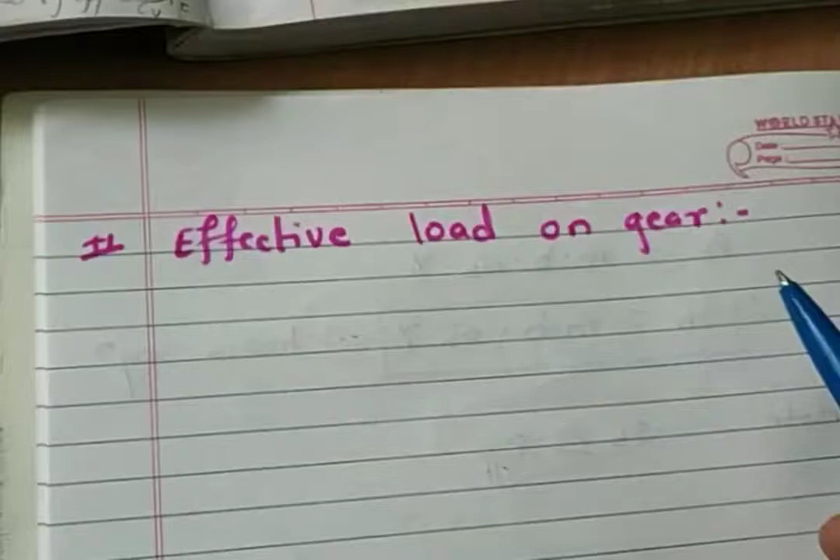Hello everyone, let's continue the design of the spur gear. Here today we are going to discuss effective load on gear.

Last time while studying the Lewis equation, we have seen that the beam strength of the gear should be greater than effective load on the gear. So let's discuss what is the effective load.

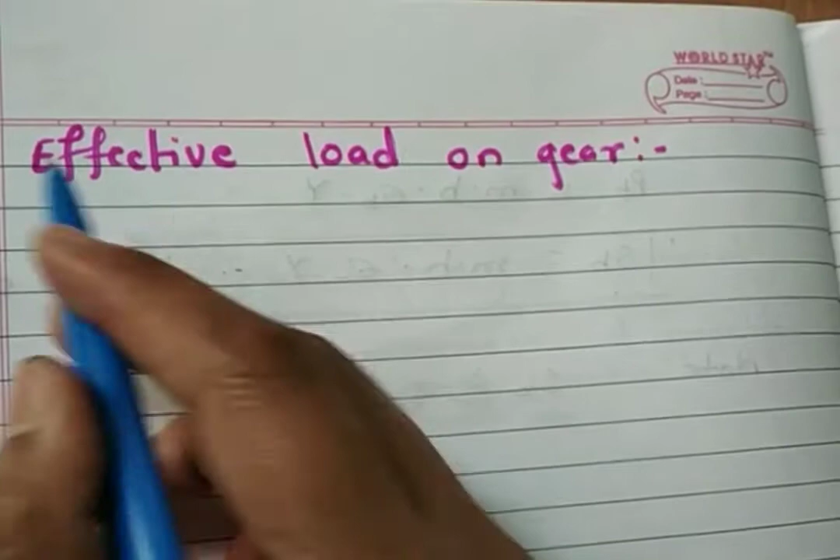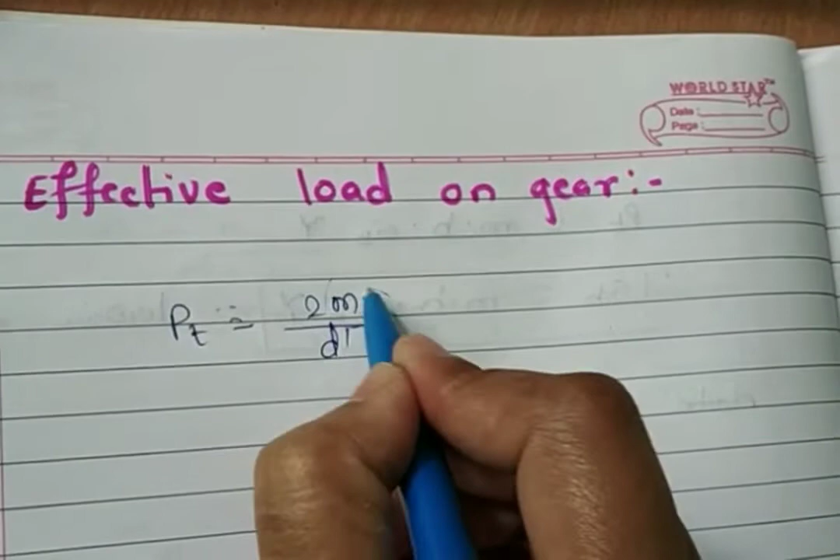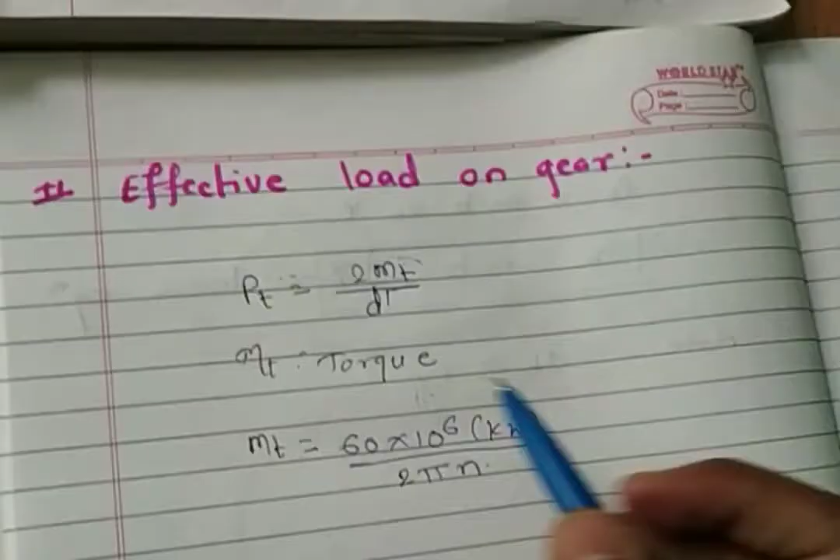We know that the tangential component of gear Pt is equal to 2mt divided by d dash, where mt is nothing but the torque. So I am going to use this mt symbol for torque, which is equal to 60 into 10 raised to 6 kilowatt, that is the power, divided by 2 pi n. So this tangential component of force is dependent on the torque, and torque is dependent on the rated power and rated speed.

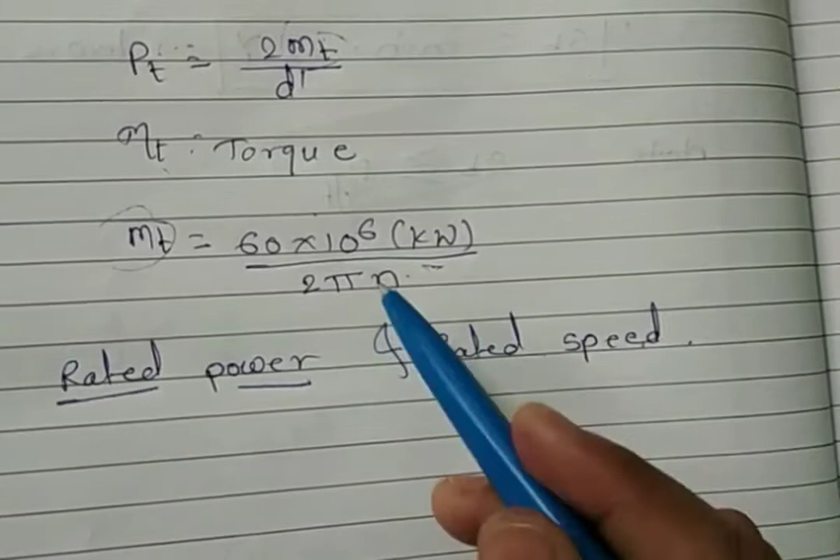Now what is rated power and rated speed? It is the amount of power that is designed under normal conditions. But in practical application, torque developed by the source of power varies during the work cycle. Similarly, torque required by the driven machine also varies. The two-side balance is done by the flywheel.

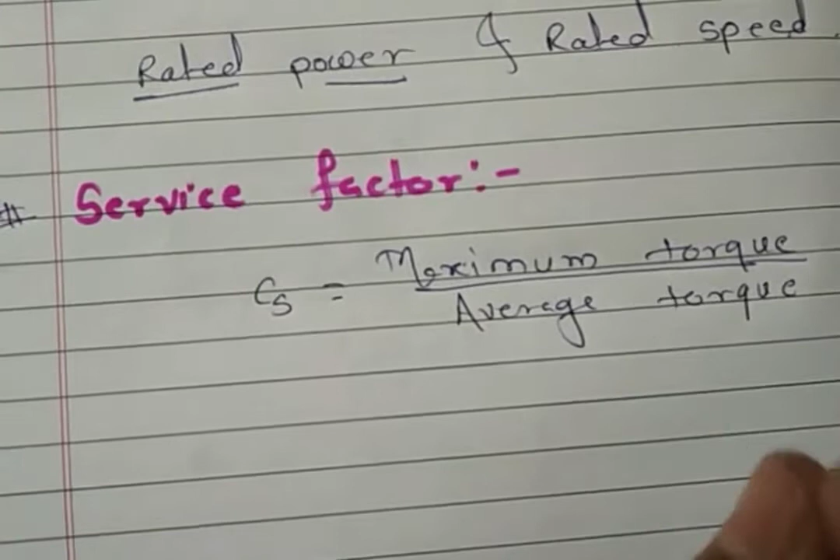So here in gear design, the maximum force due to maximum torque is the criteria. This is accounted by service factor. So let's see what is service factor. In design process, the various calculated values of load, that is torque and stresses, are average values of the load. And this average value is from the range of load that the component has to bear. To account for this overload factor, also called service factor, is used to design.

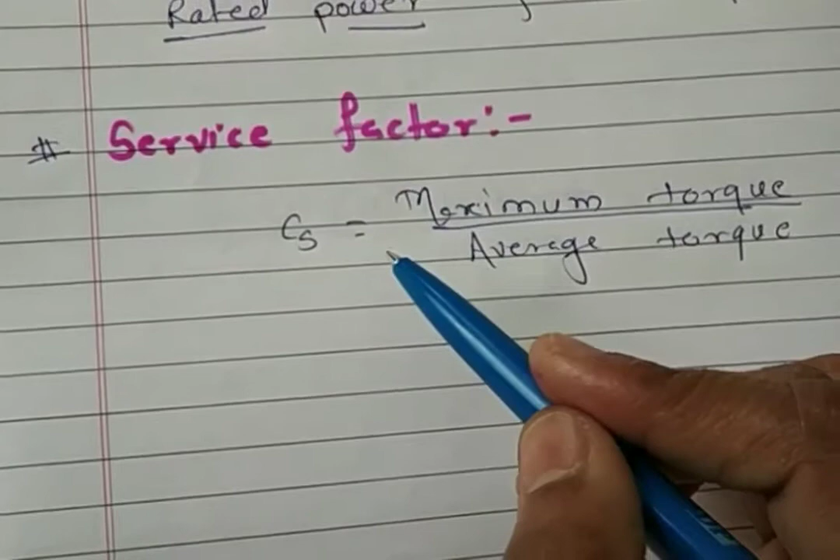The service factor is equal to maximum component of load to the average value of the load. So it is maximum torque divided by average torque.

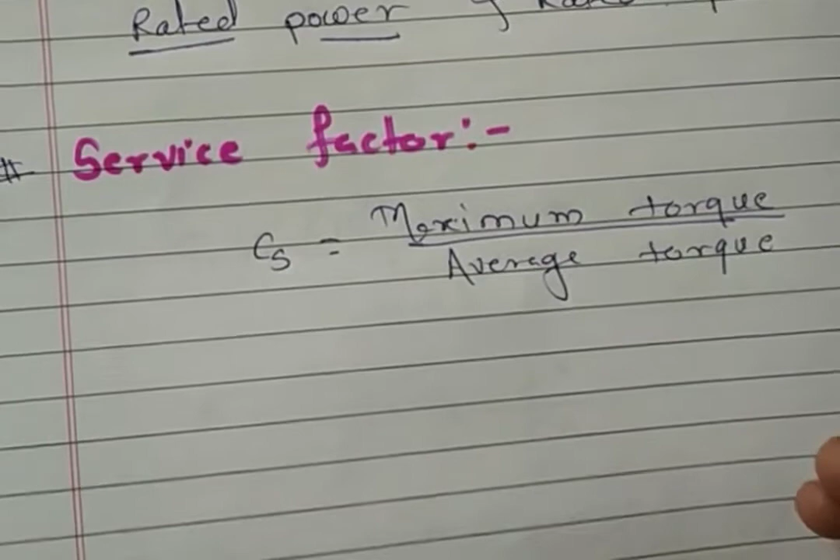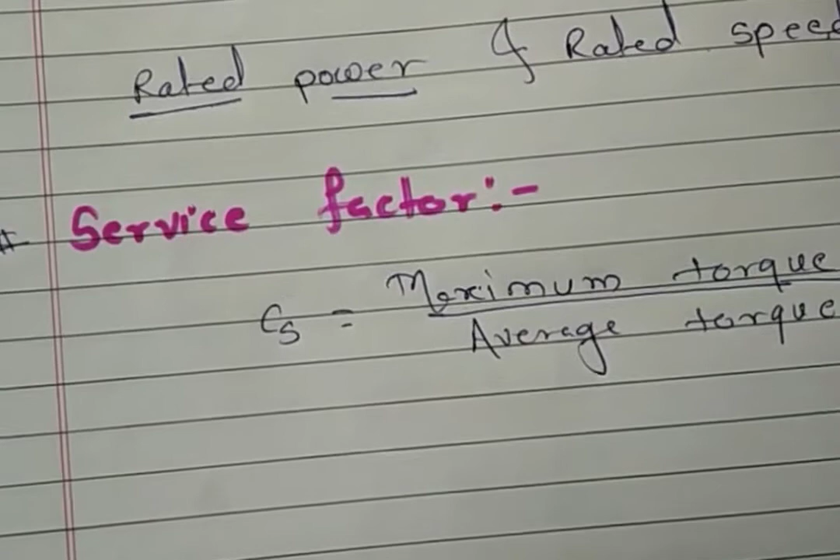Let's take one example to understand the service factor. In an electric motor, certain load is lifted using pulley and belt arrangement. The value of the load at the start of the lift is much higher than the average load to be lifted. Thus, to avoid failure of the machine component, such overloading service factor is needed.

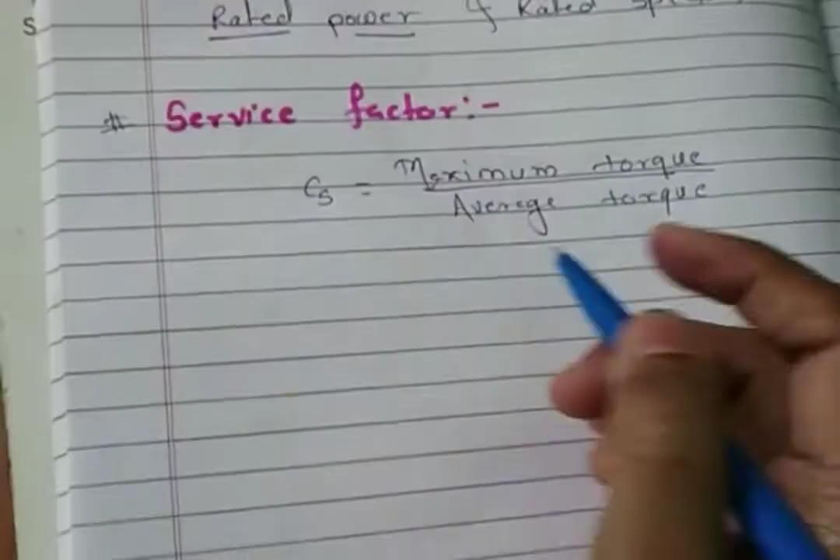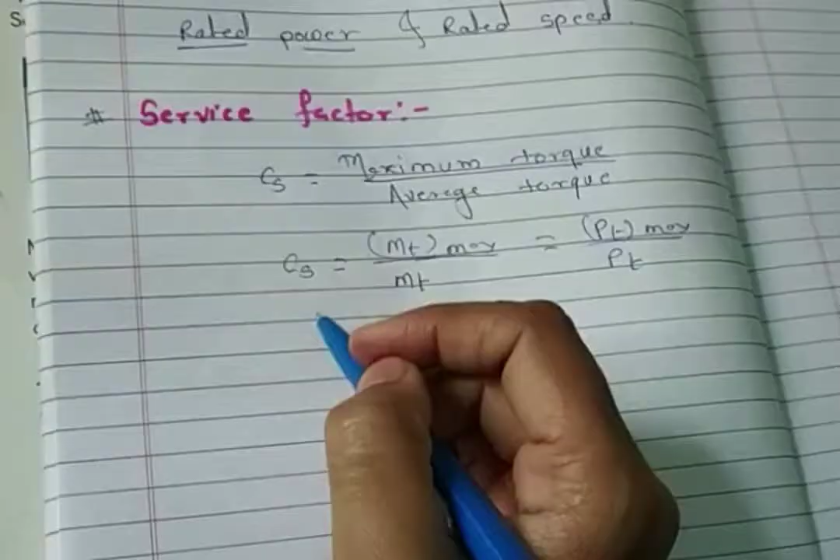So here in condition of the gear, let's write Cs is equal to, in terms of torque, mt max divided by mt. So which is correlated with Pt max, that is tangential force component, divided by Pt. So let's rearrange: Pt max equal to Cs into Pt.

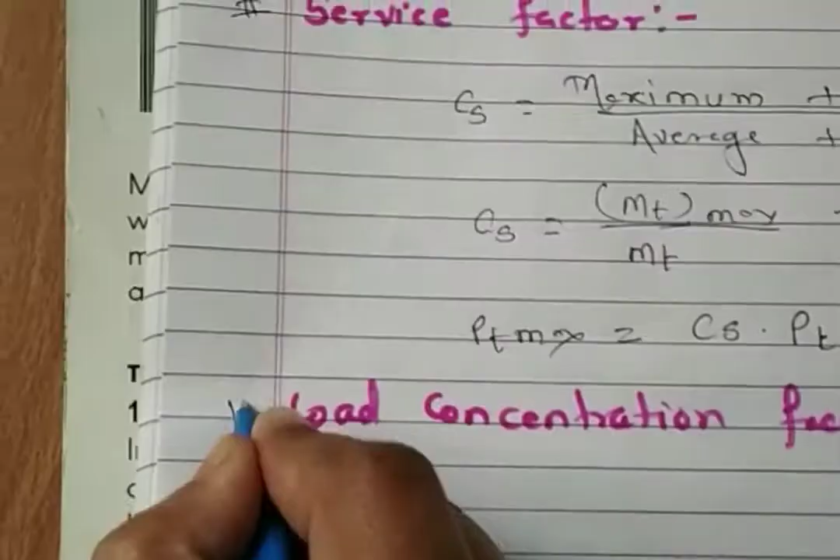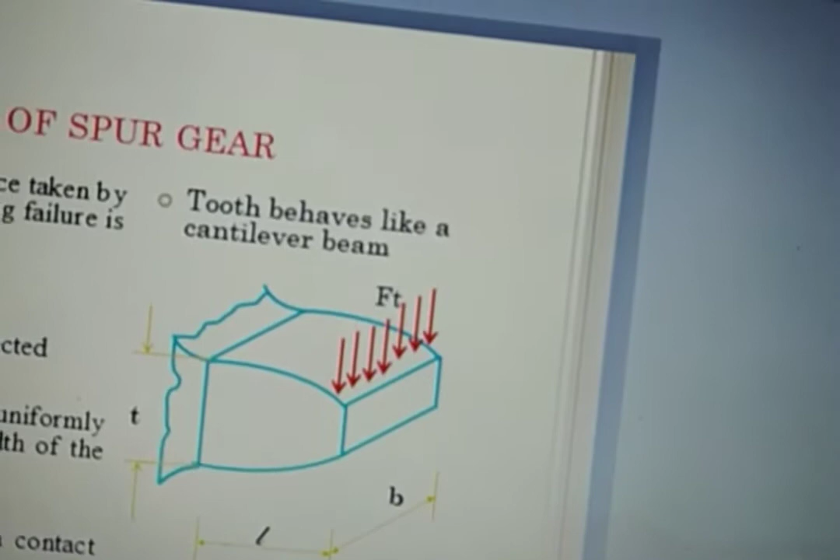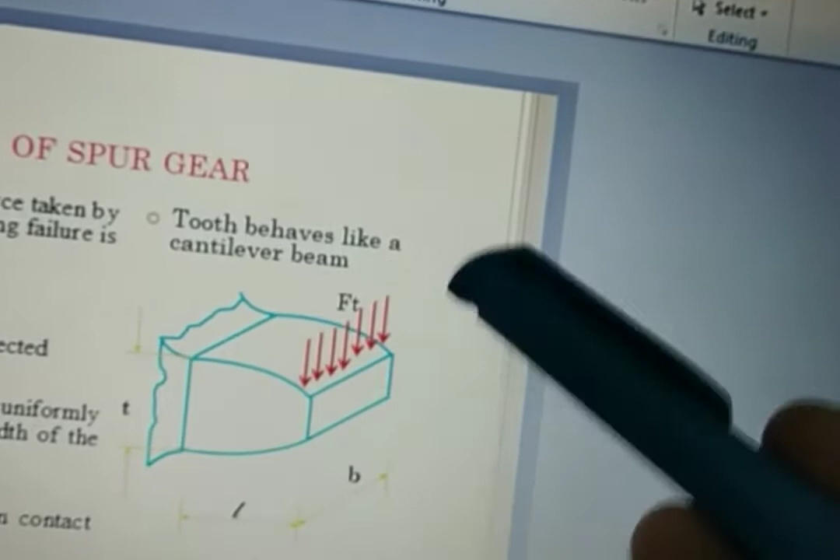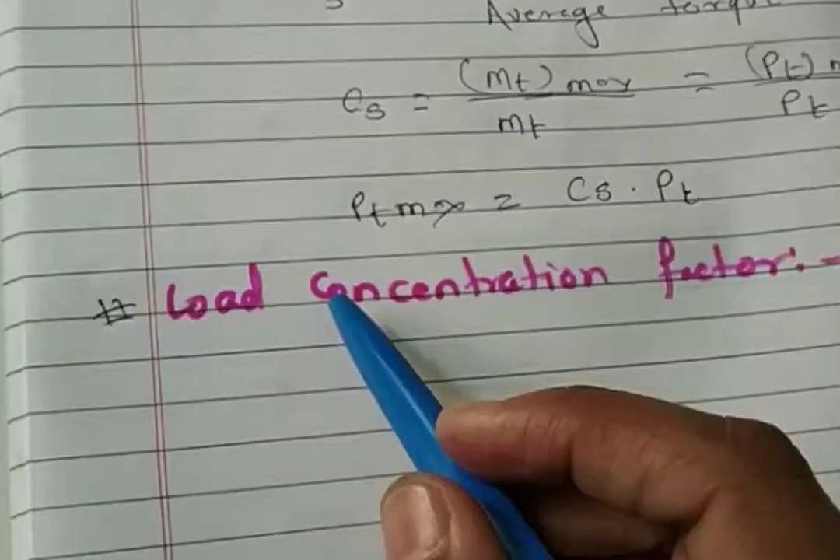Now one more important factor is there to study this effective load, that is nothing but the load concentration factor. We know that in Lewis beam strength equation, it was assumed that the tangential force on the gear is equally distributed over the face width. But practically, because of misalignment of the gear, bearing, or elastic deformation of the gear or supporting elements like bearing, housing, or casing, the tangential tooth load gets concentrated at some position due to misalignment or inaccuracy of the tooth profile. So to consider this effect, we need to study this load concentration factor.

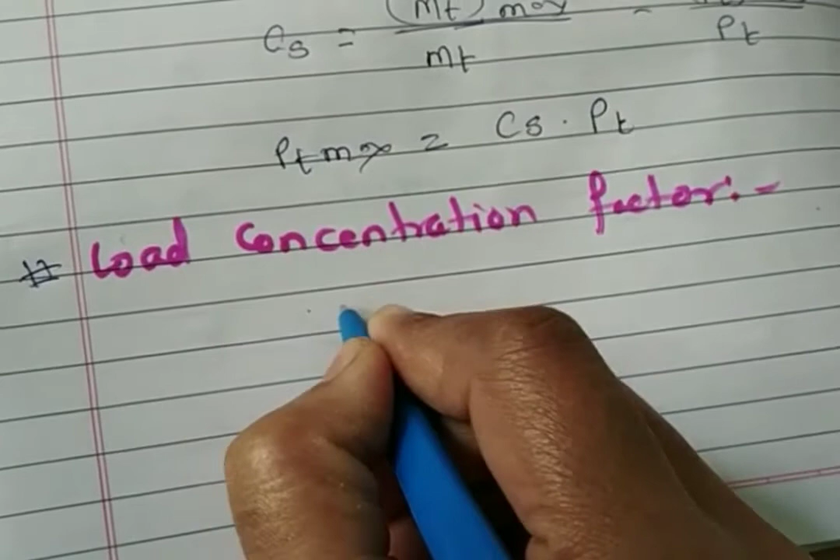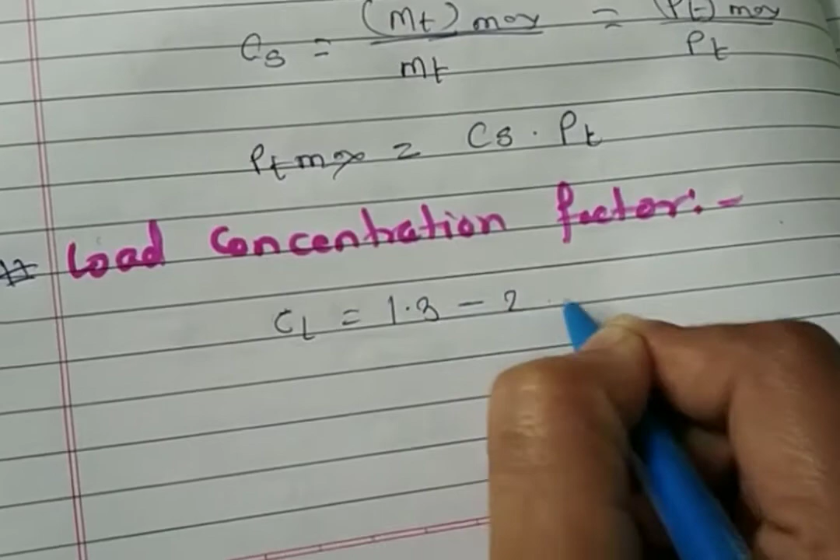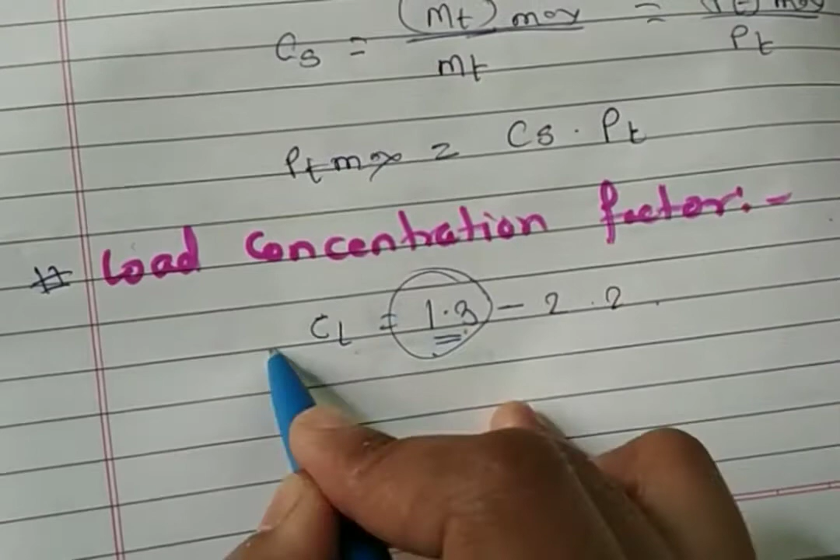So the load concentration factor range is given. Let's use the symbol Cl for load concentration factor, and it is within the range of 1.3 to 2.2. The lower value is used when the mounting is precise - when more precise mounting is recommended, we use the lower value of load concentration factor. But when average mounting is there, then we take the higher value, that is 2.2.

Now next is the velocity factor. So to study the velocity factor, we must know that when gear rotates at very slow speed, almost zero velocity, the transmitted load Pt can be considered to be the actual force present between the two meshing teeth.

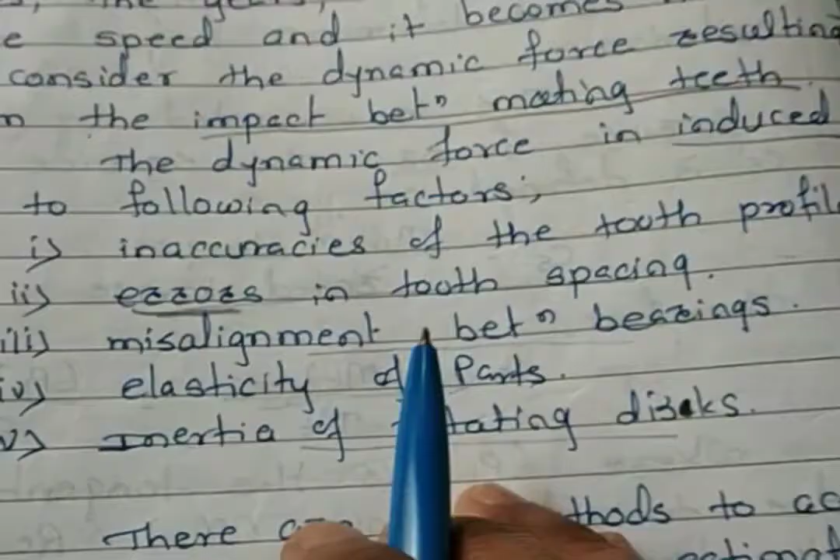But in most cases, the gear rotates at appreciable speed and it becomes necessary to consider the dynamic force resulting from the impact between the meshing teeth. The dynamic force is induced due to inaccuracy of the tooth profile, error in tooth spacing, misalignment between the bearing, elasticity of the part, and inertia of the rotating disc.

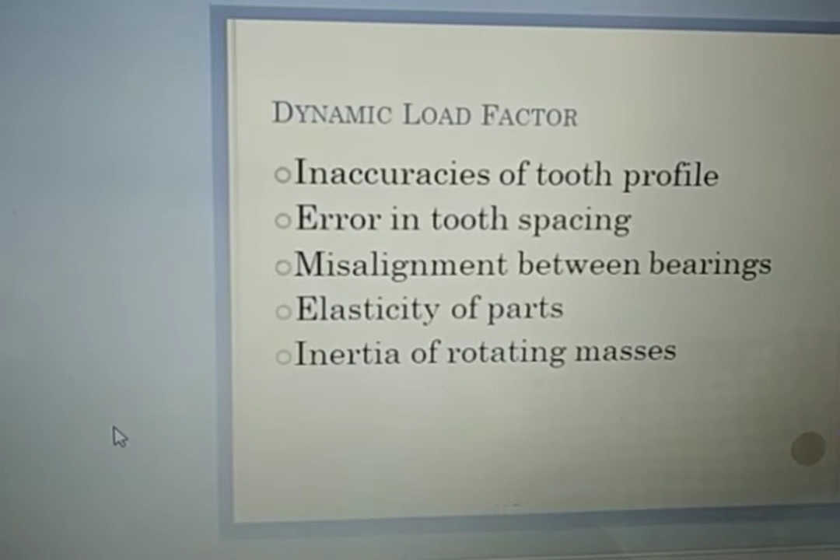So there are two methods to deal with this dynamic load: approximate estimation of velocity factor in primary stages is one, and precise calculation by Buckingham's equation is the other. So the primary stage is approximate estimation with velocity factor.

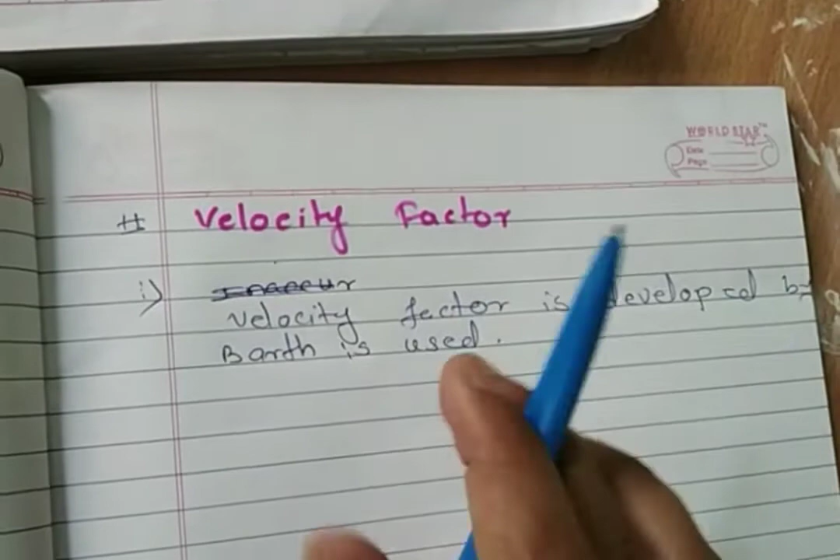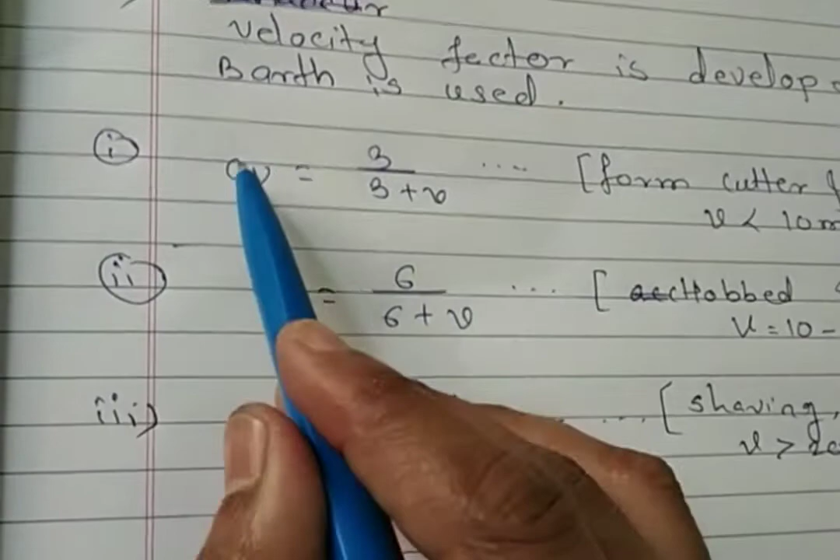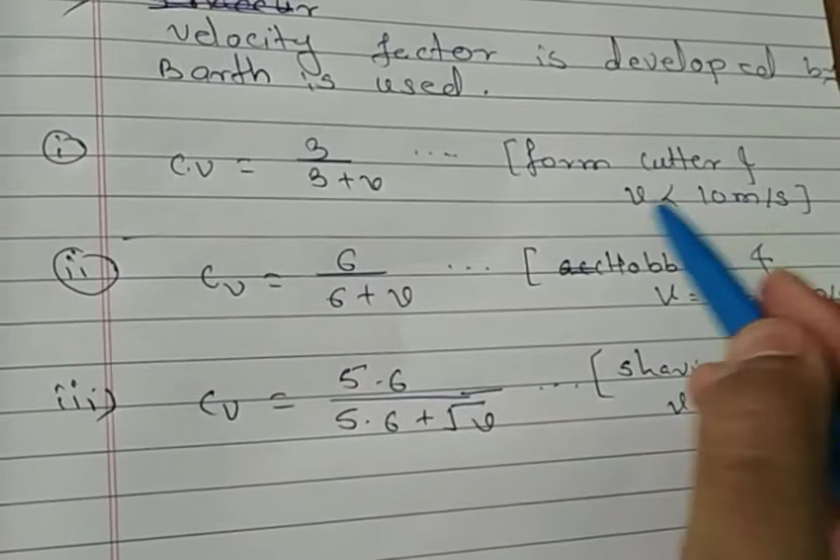It is difficult to calculate the exact magnitude of this dynamic load in primary stages. So the velocity factor developed by Barth is used. The values of velocity factor are given below. Firstly, CV is equal to 3 upon 3 plus V. When ordinary cutting is there, that is cutting made with form cutter, and the velocity is less than 10 meter per second, then we use this velocity factor, that is 3 upon 3 plus V.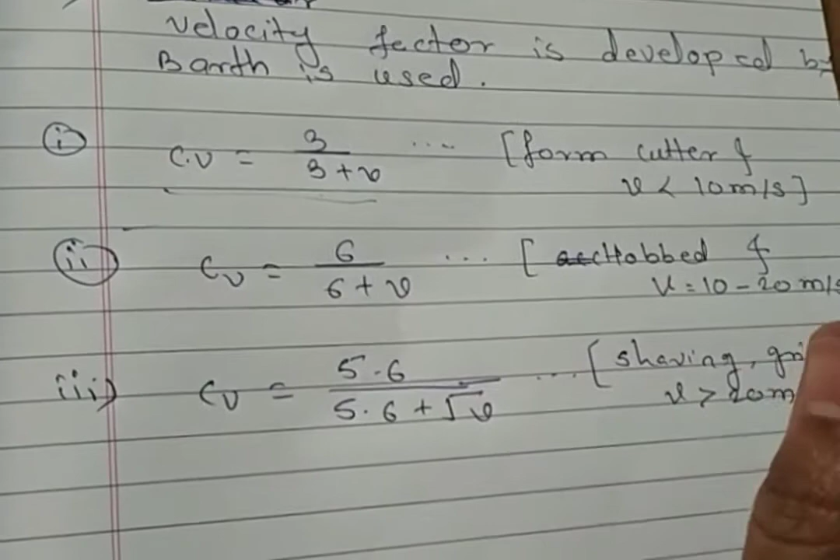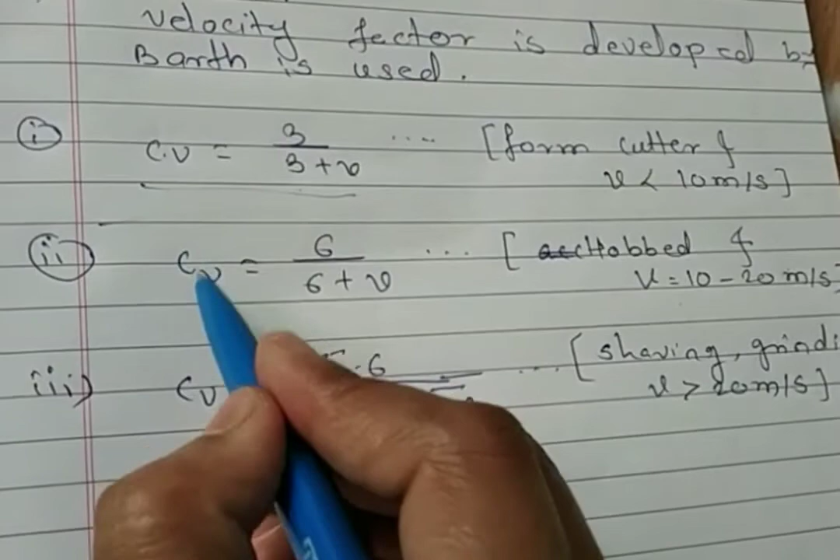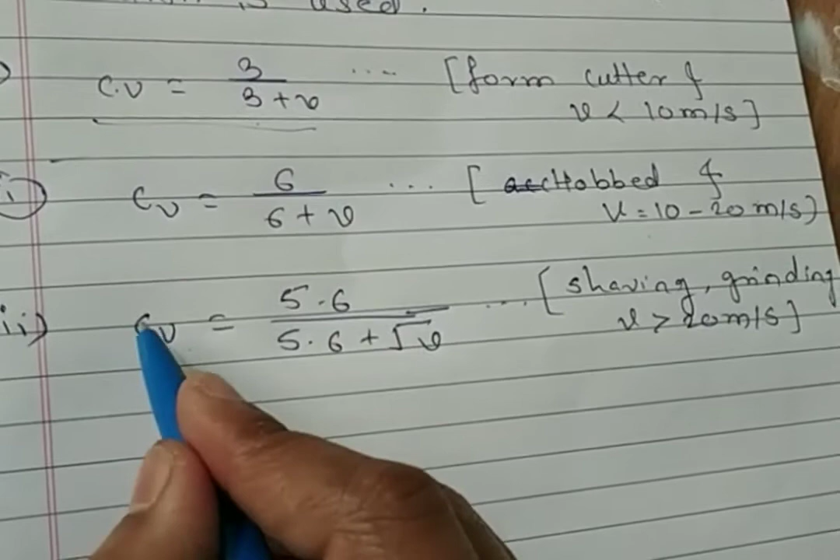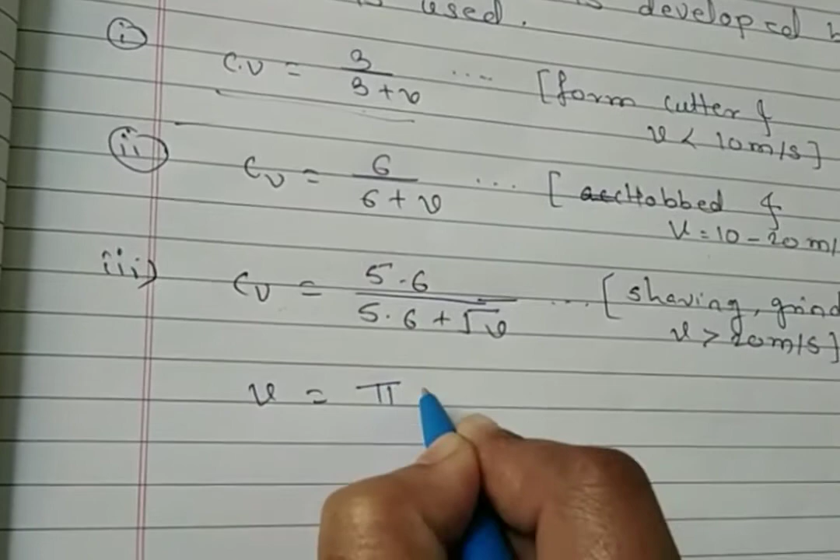When accurate cutting is there, using a hob cutter, and the velocity is within the range of 10 to 20 meter per second, then the formula of velocity factor by Barth is 6 upon 6 plus V. And when more precision gear manufacturing is there, after cutting, shaving and grinding processes are done, and the velocity is greater than 20 meter per second, then we use this formula CV is equal to 5.6 upon 5.6 plus under root of V, where V is the pitch line velocity, equal to pi dn divided by 60 into 10 raised to 3, where d is the pitch circle diameter in mm and V is the pitch line velocity.

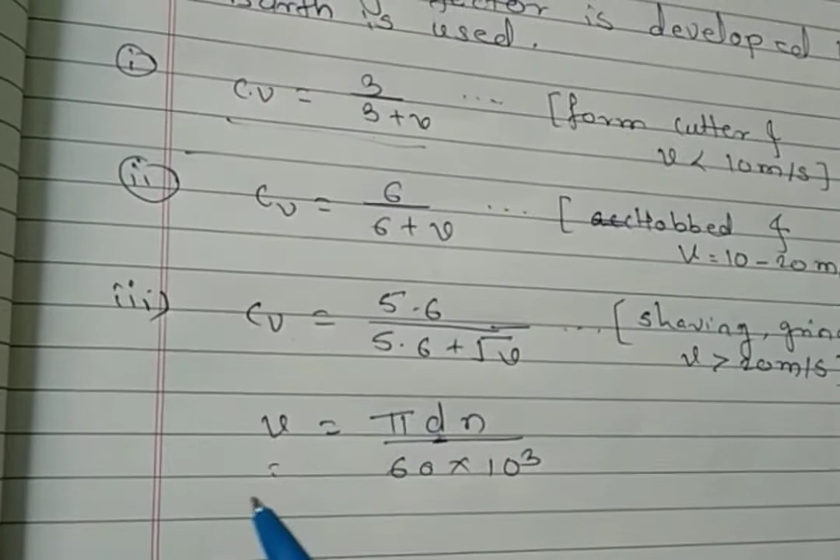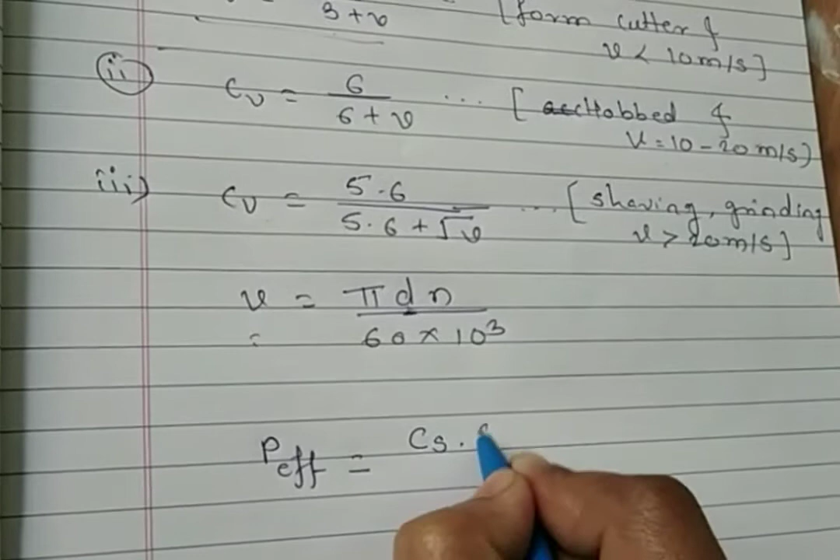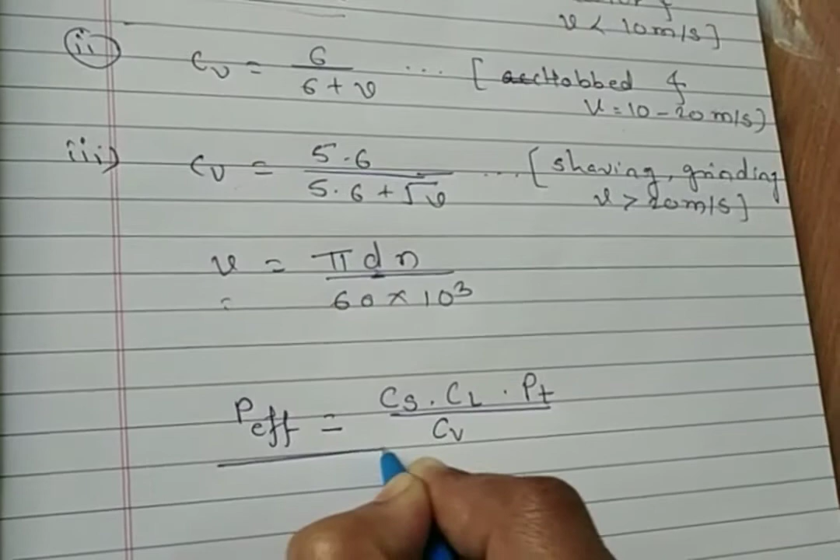So effective load at the end, we can say that the effective load P effective is equal to Cs service factor, Cl load concentration factor, into Pt, that is the tangential force, divided by CV. So this is the value of effective load in the primary stage of gear design.

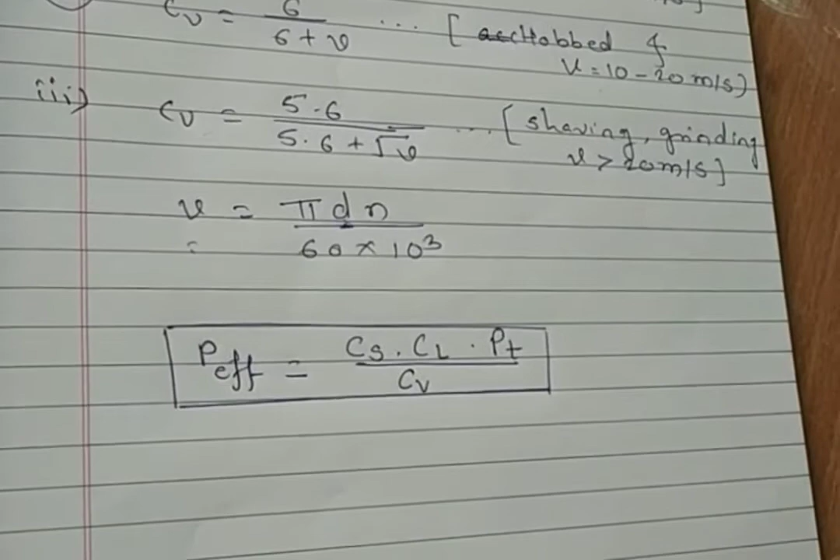Now in the next lecture we are going to see the secondary stage of gear design, where the effective load is defined by Buckingham's equation. Thank you for watching the video.